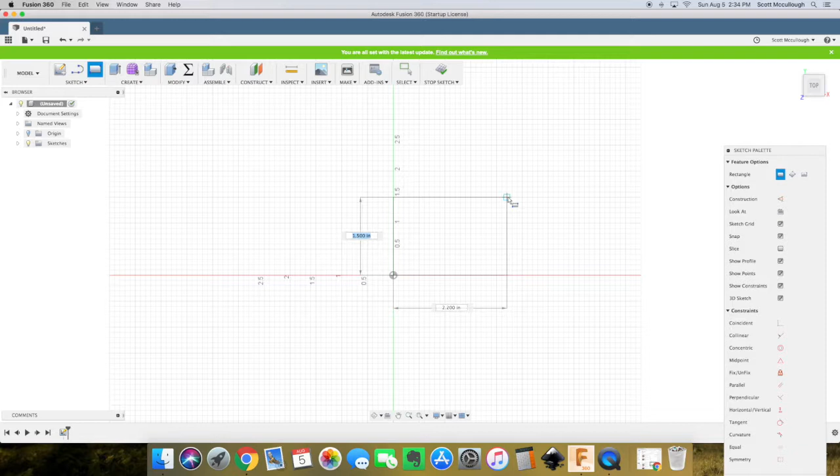I'm just going to make a basic rectangle like we did yesterday. I selected my top plane. We do R for rectangle, gives us the 2-point rectangle. Draw that, D for dimension, select this line, we'll make that 2.5 by 2.5 inches. Get this leg 2.5 inches. Now the next hotkey we're going to learn, first we're going to hit stop sketch.

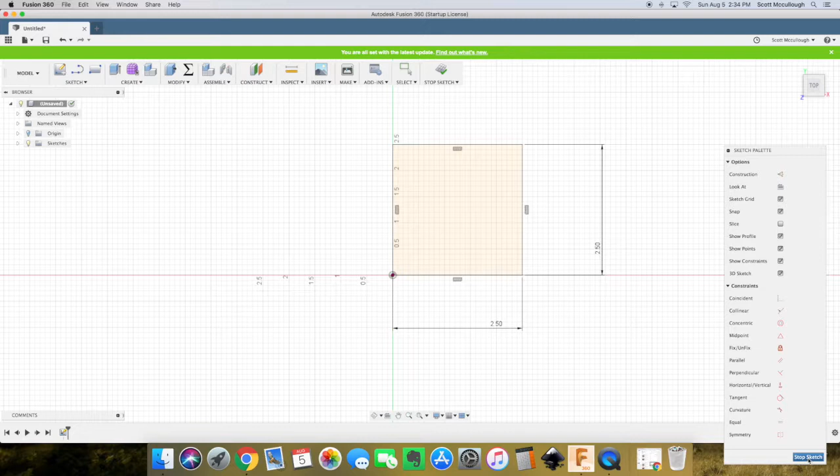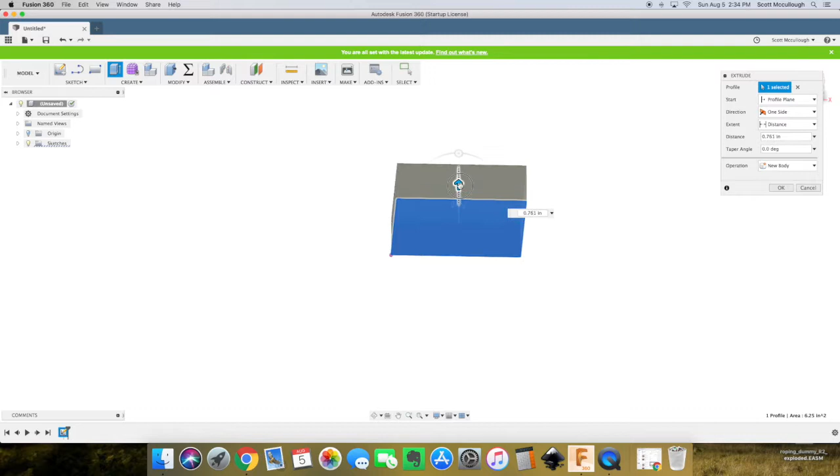Is extrude. So E for extrude, and it says here profile, select. We're going to select this profile, and I like to pan down here. Then it's going to pull that up, and as I'm holding this arrow we're getting measurements outputted depending on where we're at. So you can stop that, once you stop it selects that, and we're going to make this 1 inch. Now we have a 2.5 by 2.5, 1 inch tall cube.

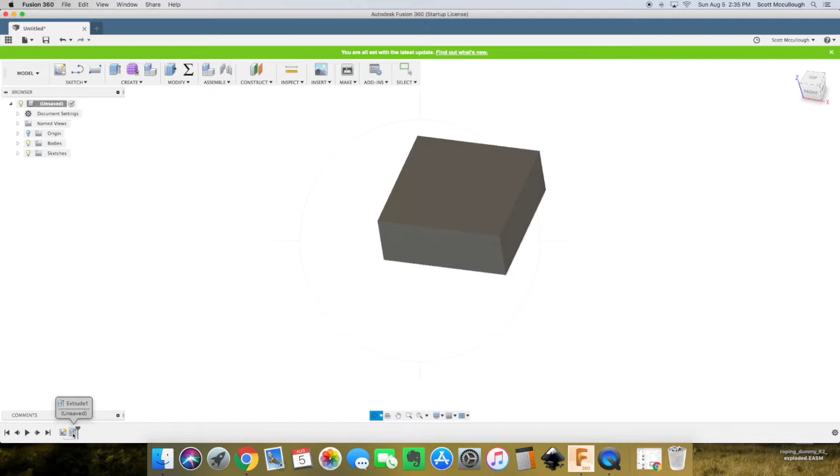Now I want to back up, and remember in the very first video when we were going over the interface, you can see in the timeline we have the extrude. It starts out as a sketch, and then you can see we got the extrude. Now let's say if I just want to get rid of that extrude, we can right click on it and delete, and it'll come back up to our tree view, turn that sketch back on, and we can go ahead and make another extrusion.

But I want to talk a little more about what's going on in this menu over here. I selected this square right now, and it's given us a few different options: profile plane, offset plane, from object - that's where you can start from. Direction: one side, two-sided, or symmetric. And it gives us distance or to object.

We'll use this to object. Say if we had like 2 poles, and we wanted to extrude between the span, you could select the one face on the right pole and select the face on the left pole, and then it'll extrude in between those. That'll make more sense in future videos. But most commonly you're just going to use one side and two-sided, and mostly all I use is one side.

And the distance, you could type this, it's the same thing here as it is here. So that's the taper angle. Basically puts an angle on when you're extruding, which I've used a few times when getting into stuff on my CNC, but for our woodworking and demonstration purposes, we're just going to stick with that for right now.

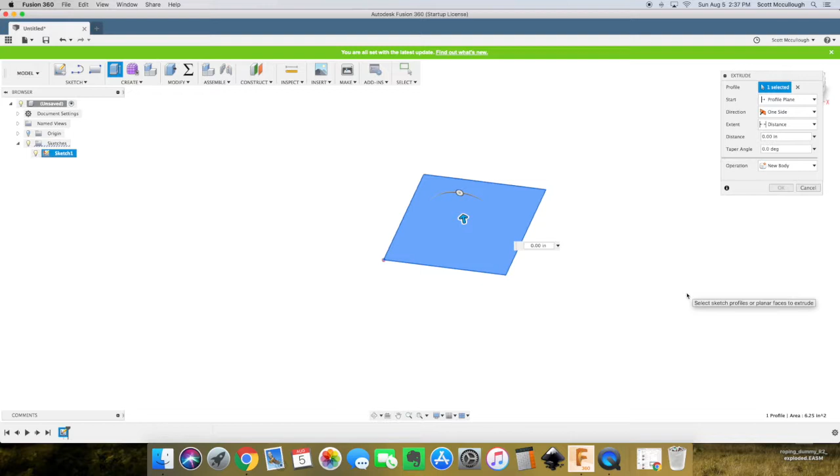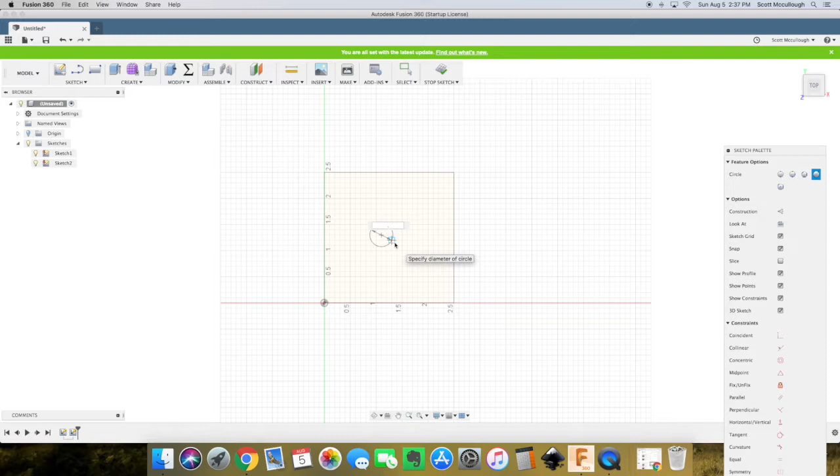So I want to show you, creating sketches on top of sketches, how we can extrude both of those. I'll show you what I'm talking about. So I'm going to create a circle. Create sketch first - this is what I'm talking about, you got to either sketch on a plane or a face. We're going to sketch on this face. Circle, make a 1/2 inch circle, 0.5, enter, we'll just leave that right there.

So I'm going to hit E for extrude. Just get the circle - mouse is twitching out. There we go. I'm going to extrude this up 0.75, so 3/4 of an inch. Okay, now we can see we extrude our cylinder out.

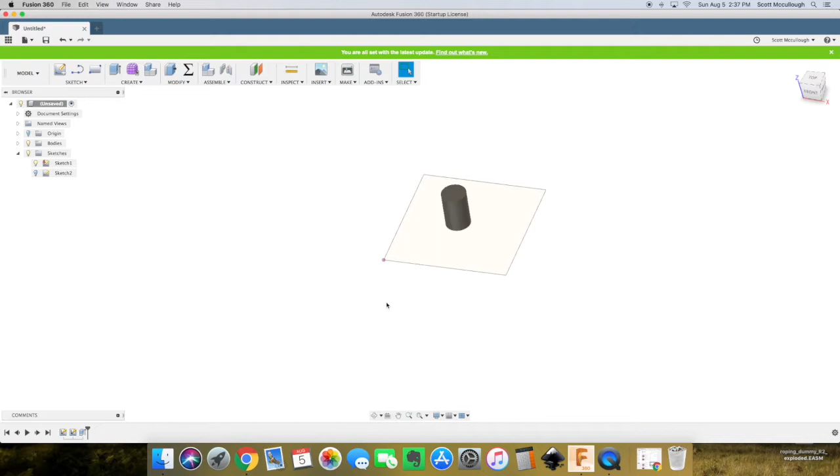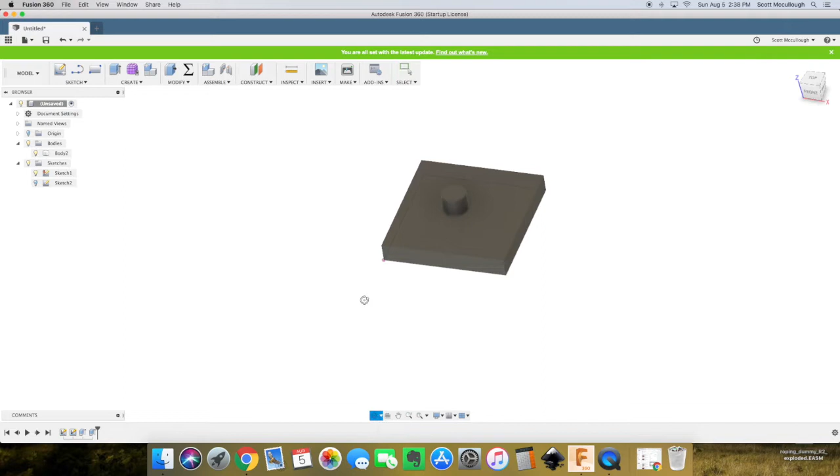I just want to extrude this out. I'm going to select it, and I'm going to hit join instead of new body. The reason I do that, hit that join, is because I want this to be connected together. When I extruded that, I didn't want it to create its own body - if you do that, it would have kind of made this disappear. So now you can see we got a little extruded square, and then we got the cylinder in the center there.

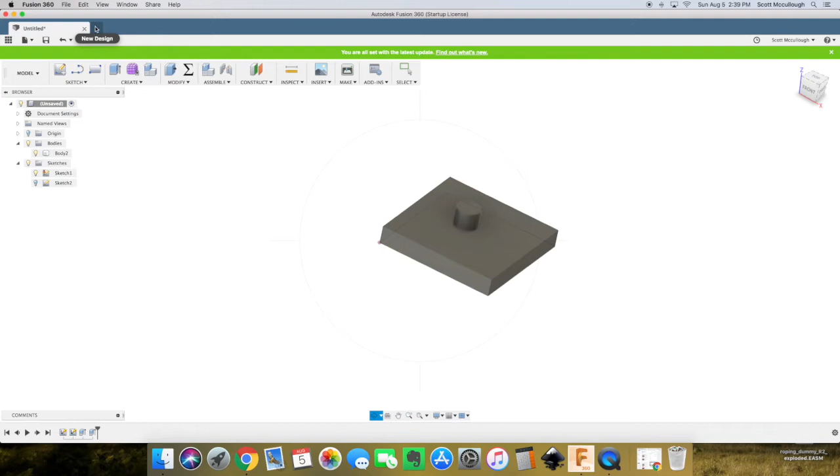So I'm going to create a new design - tab like Google up there, Google Chrome if you're familiar. I just want to keep this basic with our woodworking here. So 2-point rectangle, and let's make that sheet of plywood again, but this time we're going to make it 3-dimensional.

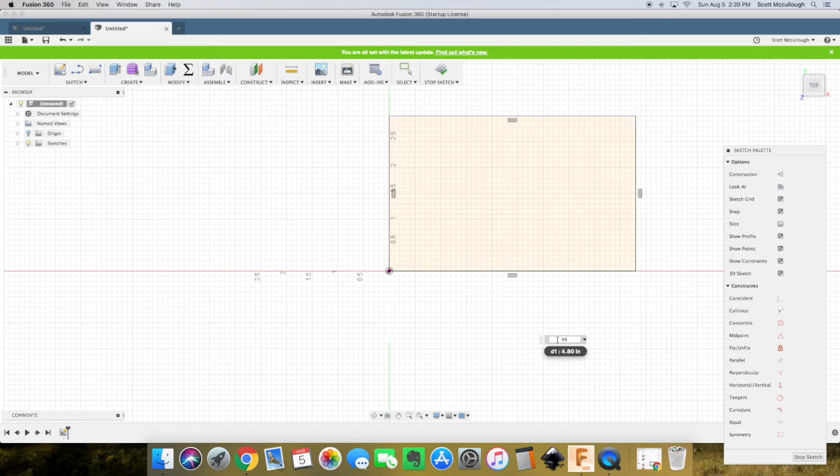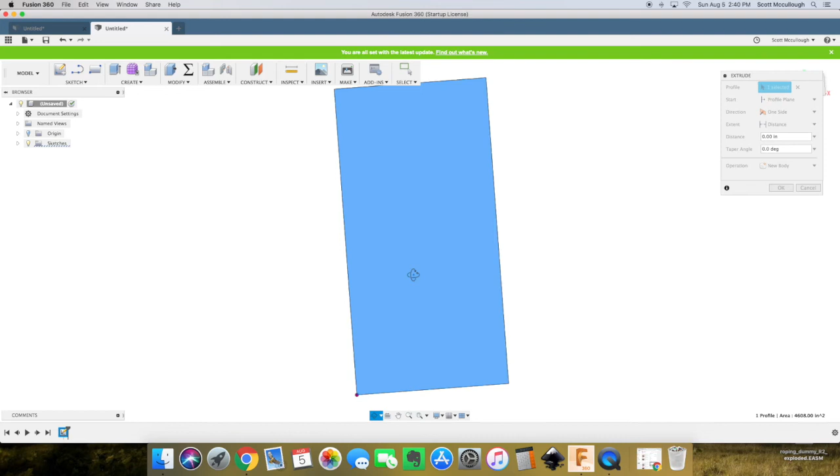So dimension, 48 inch. Okay, by 96 - 8 foot, 96 inch. F6 to zoom out to our extents. Okay, E for extrude, I like to pan down so I can see what direction I'm going. You can either go plus or minus on this - I usually go up just because that makes a little more sense to me. So I'll make a 3/4 inch sheet of plywood, 0.75.

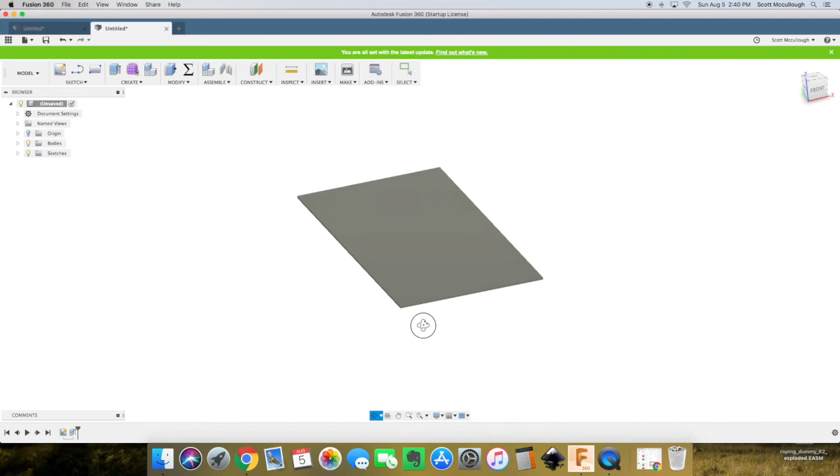There's our sheet of plywood. You can pan around it. And then you can do what we did yesterday in creating sketches, and make your rectangle over here and draw it in there to get your layout figured out for cutting your sheets.